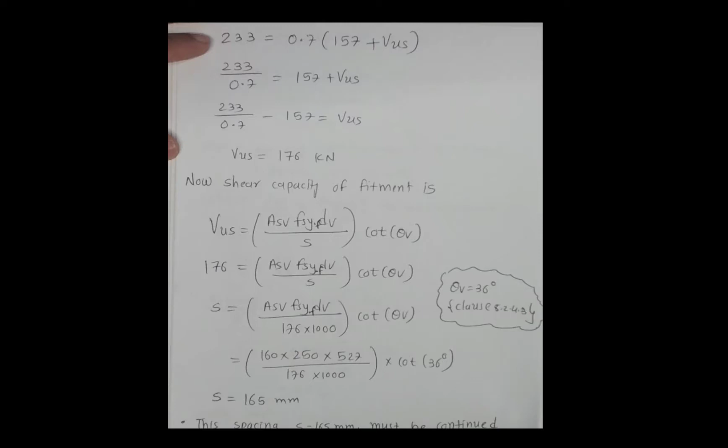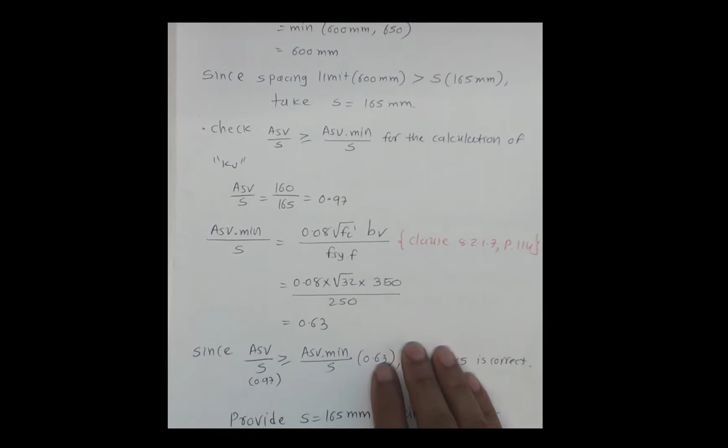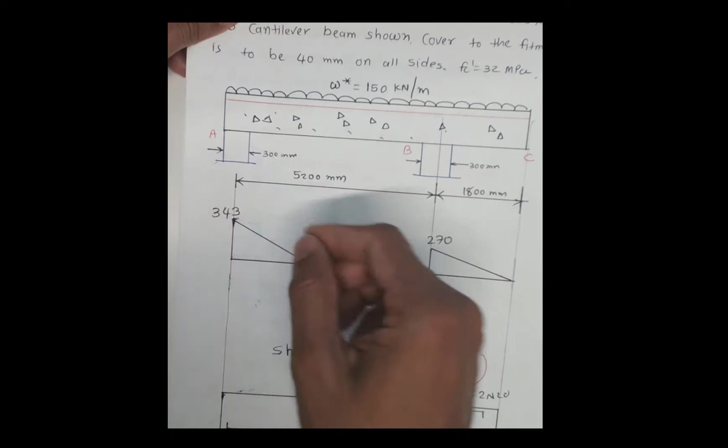Continuing from the past video, we have S equal to 165 millimeters. In that 165 millimeters, we have verified some assumptions here as shown. Now we just need to do some detailing as per the questions. We now work and find the spacing close to support A, which is in this region, and we can draw this view here.

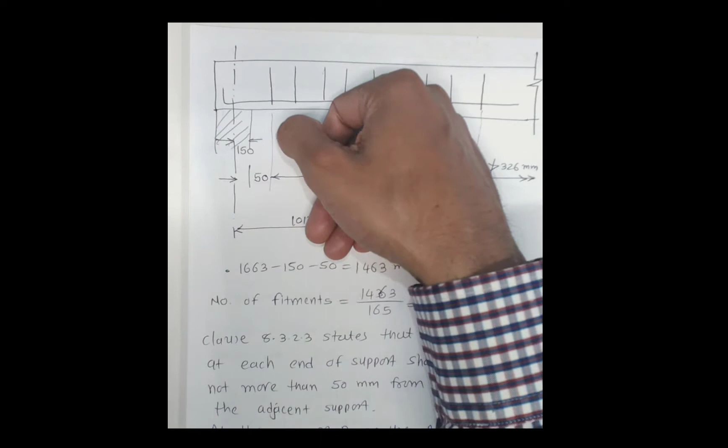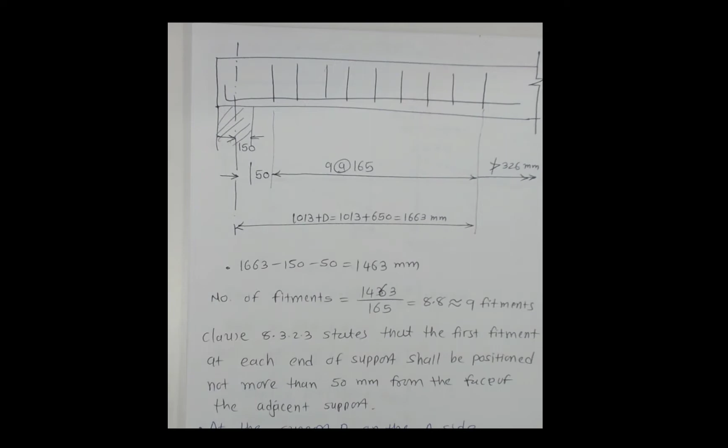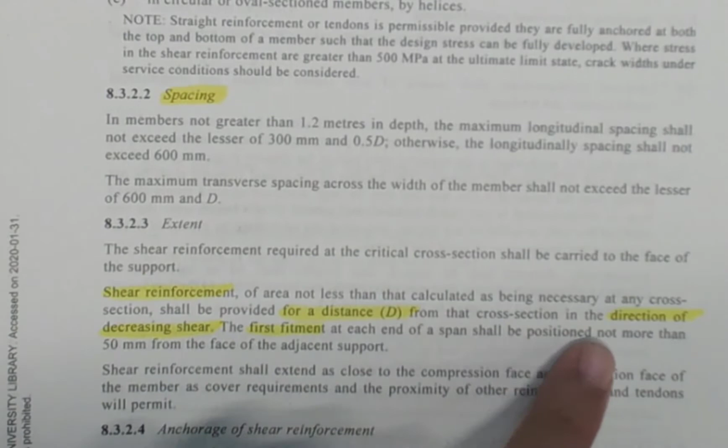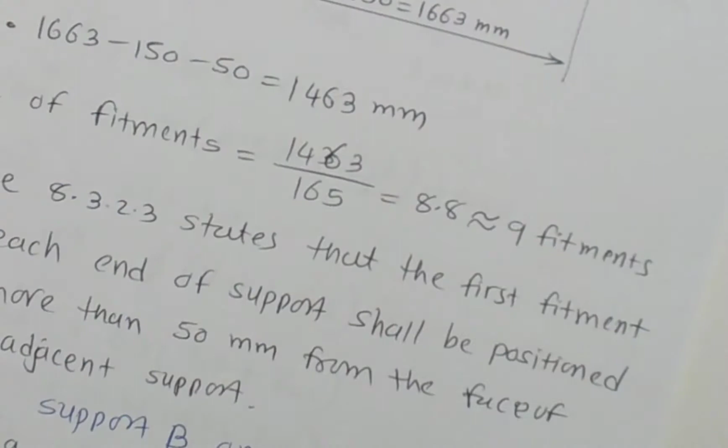Now there is a quick notation here. The first fitment should start at 50 millimeters. This is given in the standard in clause 8.3.2.3. On page number 125, clause 8.3.2.3, we have a line stating the first fitment at each end of the span should be positioned not more than 50 millimeters. So we cannot put the spacing more than 50 millimeters; the first fitment should be placed up to 50 millimeters. You can put less than 50 millimeters, but not more than that. So that's the logic, that we put the first fitment at the closest position.

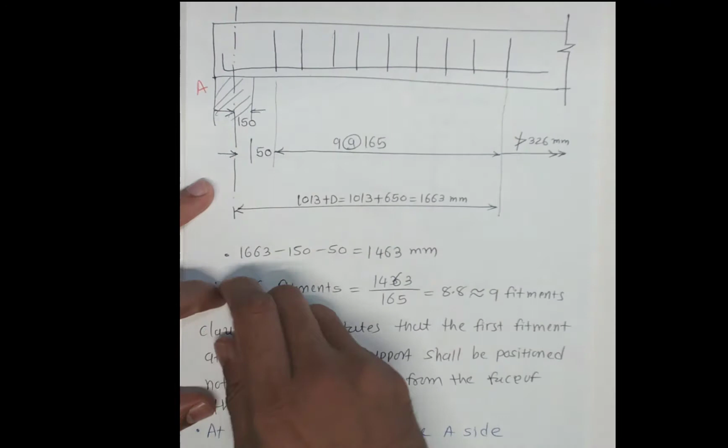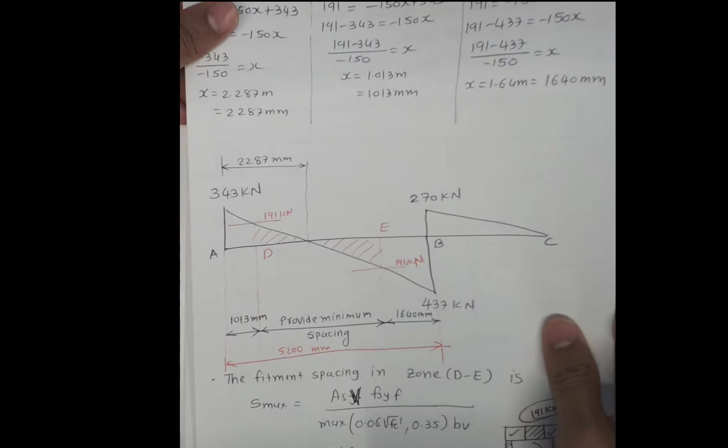This is support A. Close to support A, we have 50 millimeters for the first fitment. Now we need to find this distance. As I mentioned, we know this distance from the previous calculations, which is 1013 millimeters. Now we can't just take 1013 millimeters, we have to extend up to distance D.

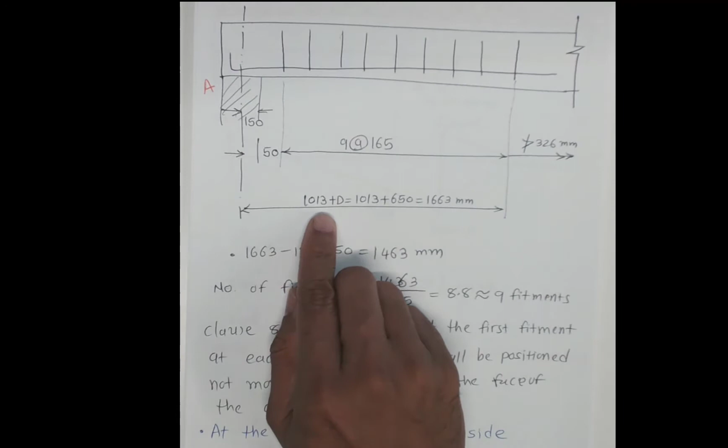So I have 1013 and then plus D, and D is nothing but given in the questions as 650 millimeters, which is the depth of the beam. So that gives 1663 millimeters. Now this is measured from the center of the support.

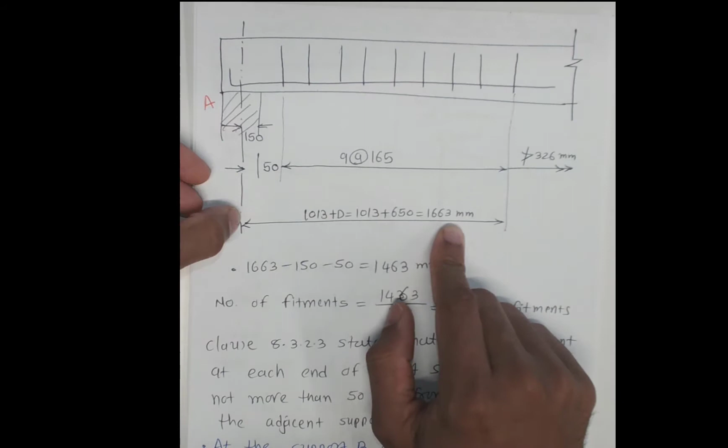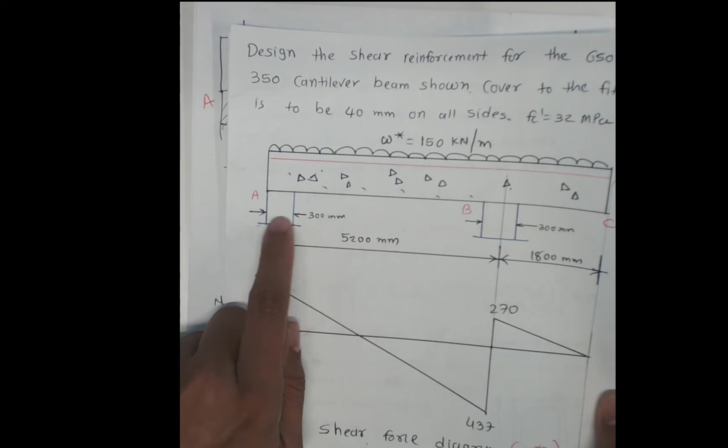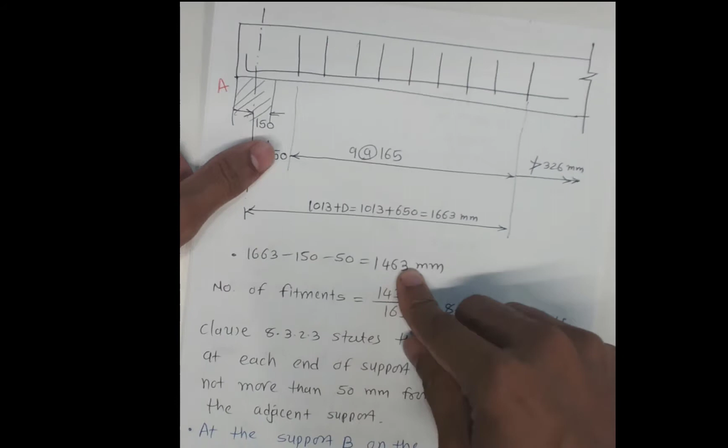So if I want to find this space, which is 1663 minus 150, because the support has a 300 millimeter width, measuring from the center it's 150, minus the first 50 is... that gives us 1463 millimeters. So this distance from the first fitment to the last fitment is 1463 millimeters.

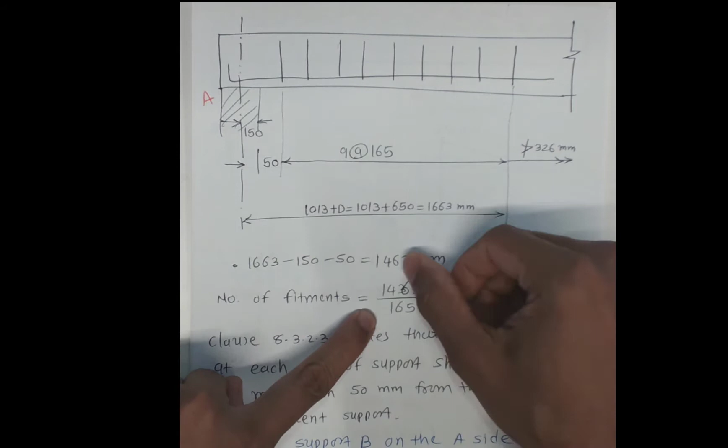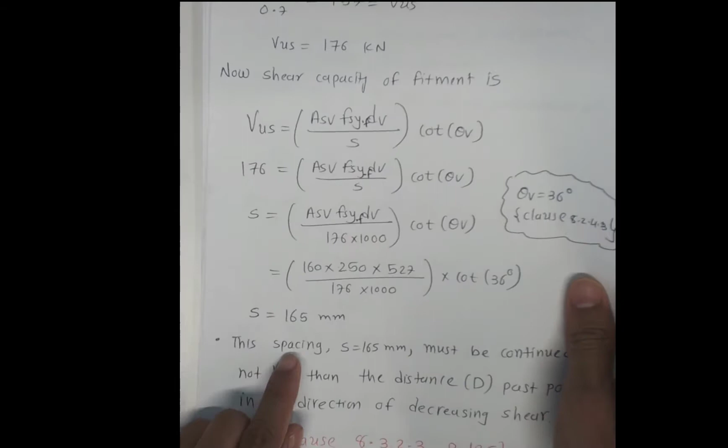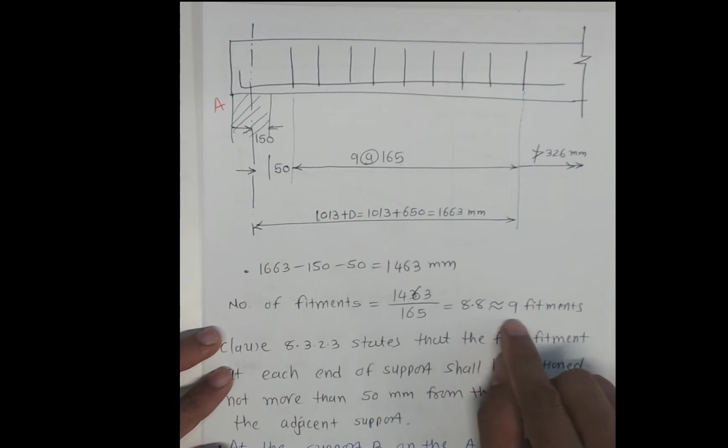So now we need to know how many fitments we can put here. To find the number of fitments, we take 1463 divided by the spacing we found, which is 165 millimeters, that spacing we use it here. So we get 8.8, we can't put 8.8 fitments, so we round off to 9 fitments. So we can provide 9 fitments at a spacing of 165 millimeters.

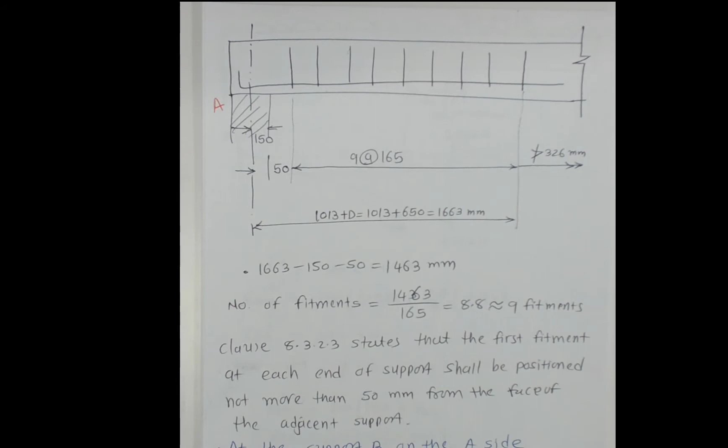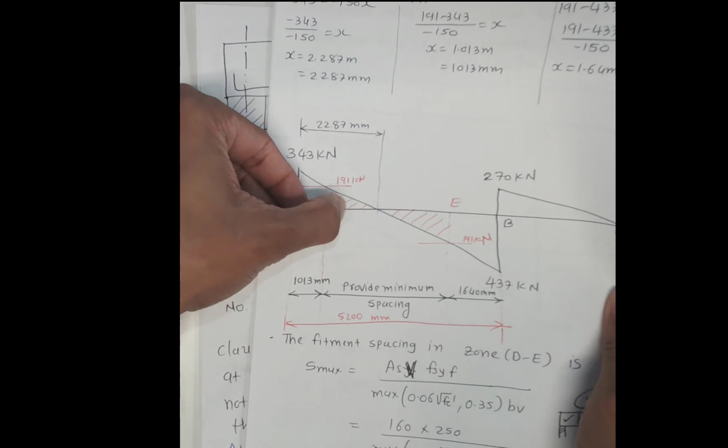And from this line, which is shown here, from here to here, and from this line onwards, we can provide spacing of more than 326 millimeters. So that's the spacing in this zone.

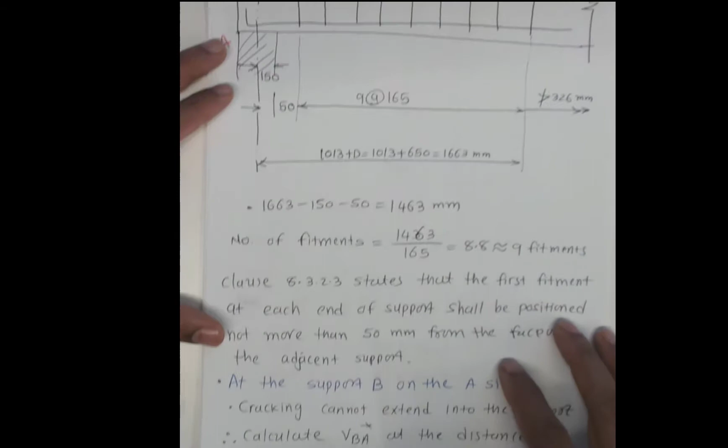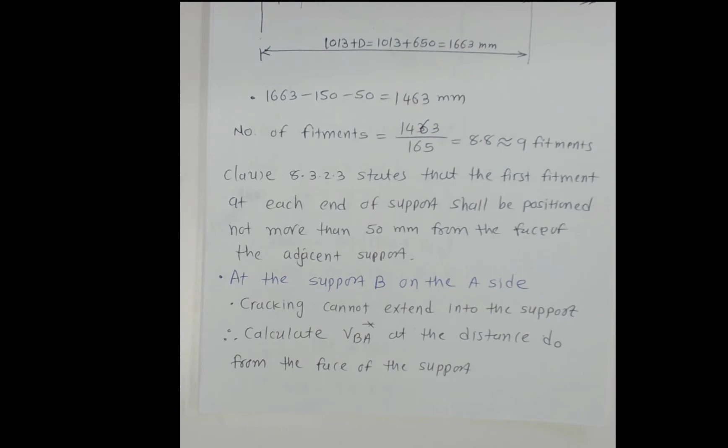Now we would like to find the spacing at support B on the A side. So what we found so far, let me summarize: we found a 165 millimeter spacing, and we also found a 326 millimeter spacing.

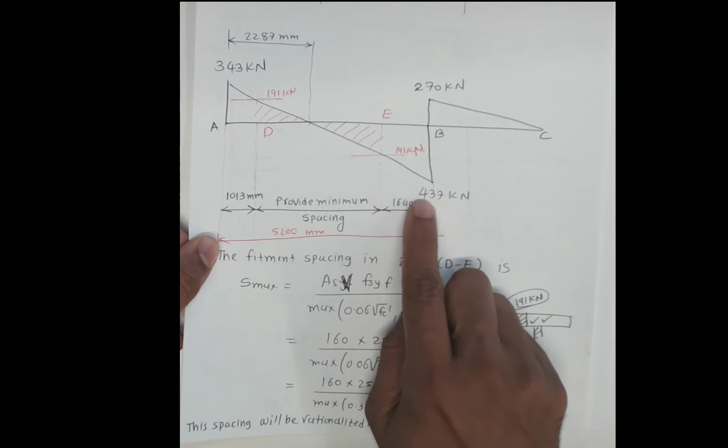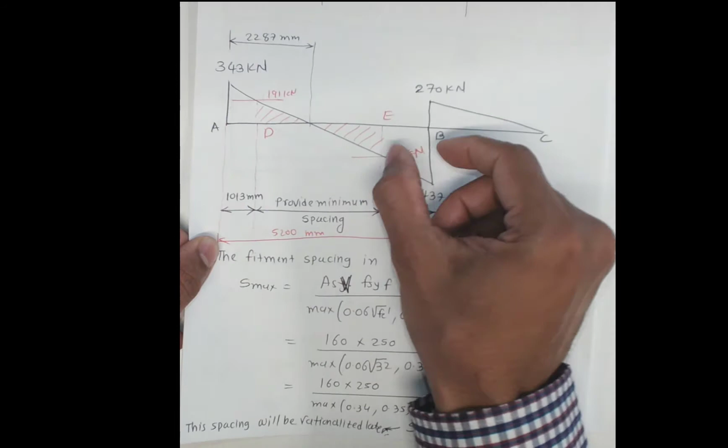Now at support B, we need to find how much spacing we can provide. This one is more critical, you can see they have a larger shear force here. So definitely we will have a spacing smaller than 165, because we need to resist this high shear force. Now we are working close to support B, and we need to find what the spacing is in this region.

Now at support B, we need to find how much spacing we are providing, and it's on the A side. So I'm talking about on the A side, how much spacing we're going to provide on this side, not that side but this side.

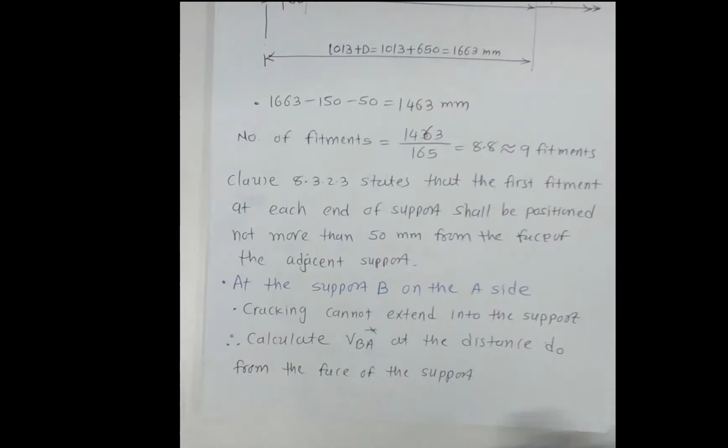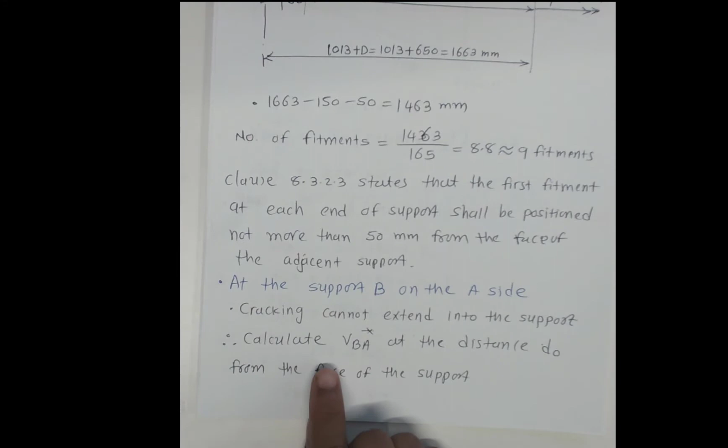Now cracking cannot extend into the support. For example, cracking will not happen in the supports, but the cracking will start from some distance from support B. So we calculate VBA at a distance of D0 from the face of the support. The cracking generally starts at D0 distance, and this is given in the standard.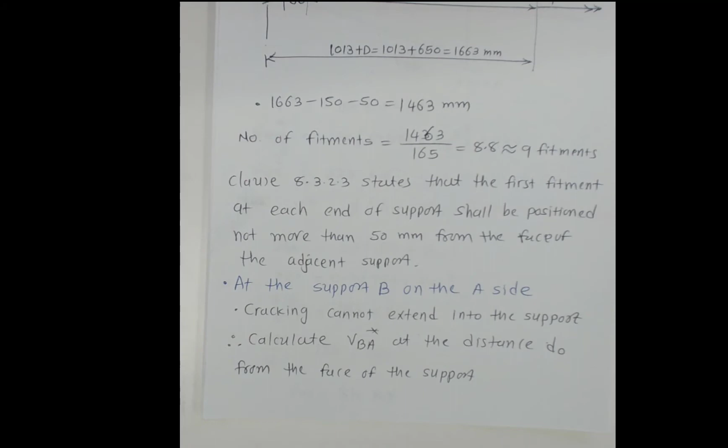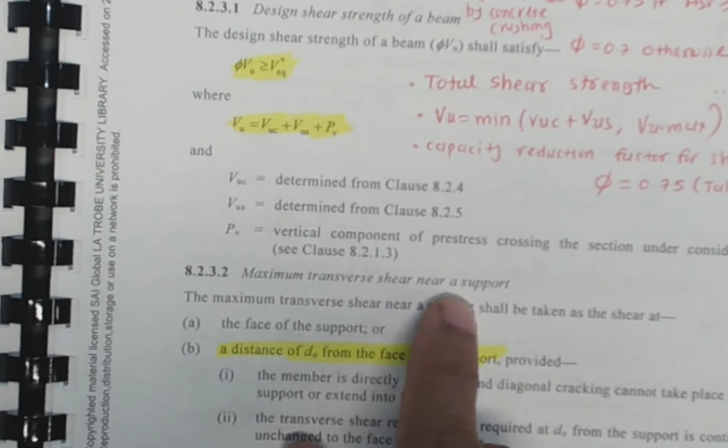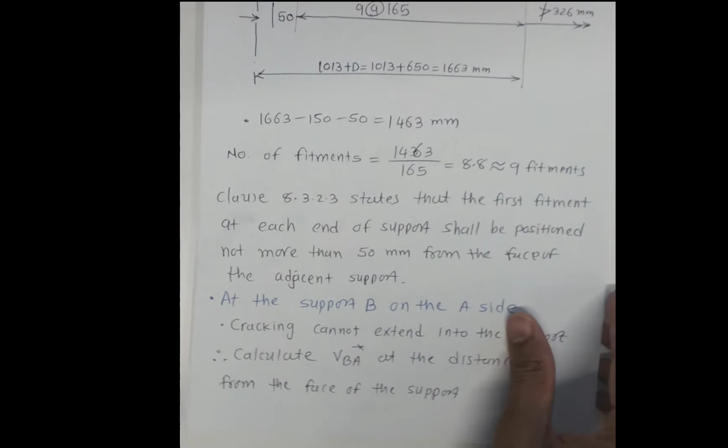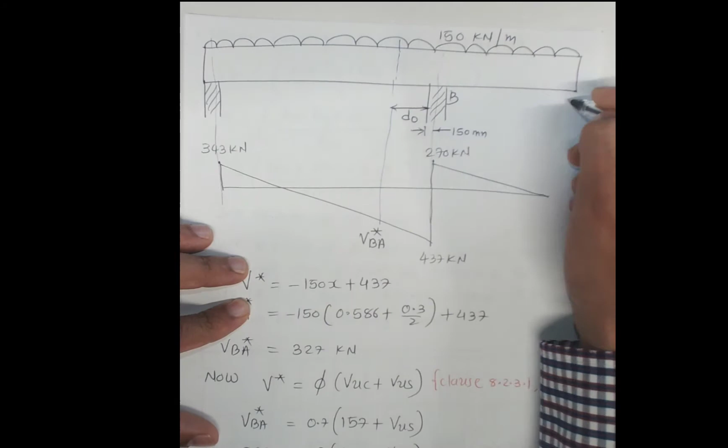So for that case we can draw these figures here, and we have these supports, which is support B, support C, and this is support A, and we need to find the distance d0 from support B, and this is 150.

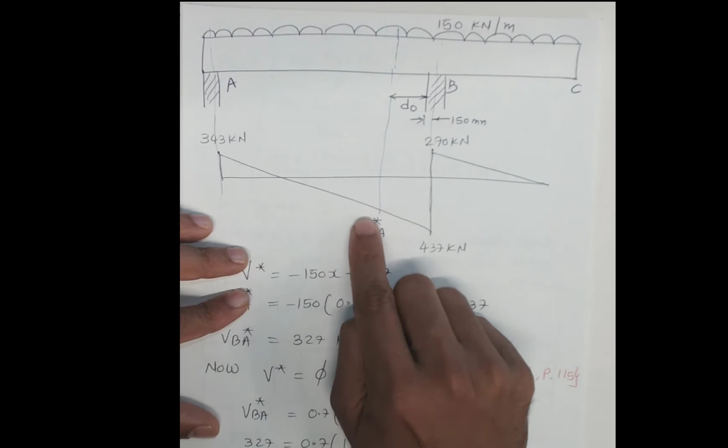So basically we are interested in this shear force. What is this shear force? That is our design shear force. We can't take 437 because the cracking is not at 437. The cracking generally starts far from the support, because we have a concentrated reaction force. That concentrated reaction force has an effect, so the cracking does not start here. There may be some different scenario, but not for the shear cracking.

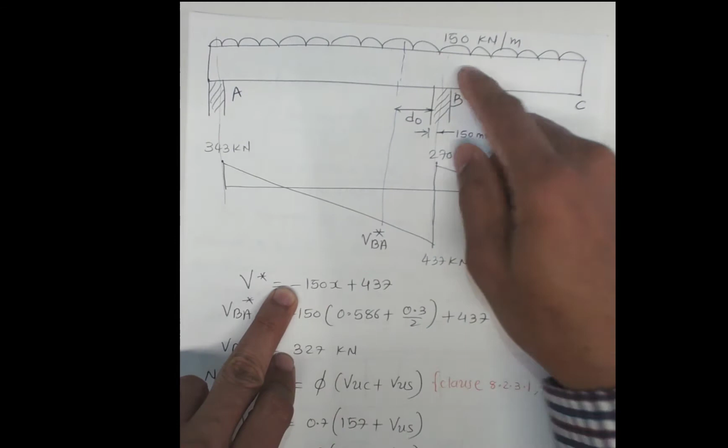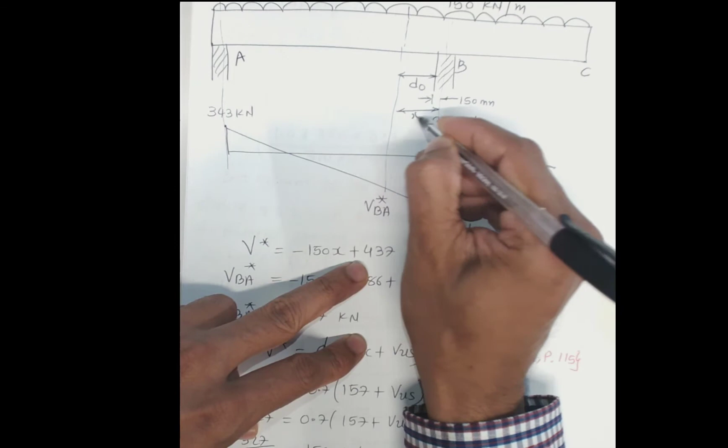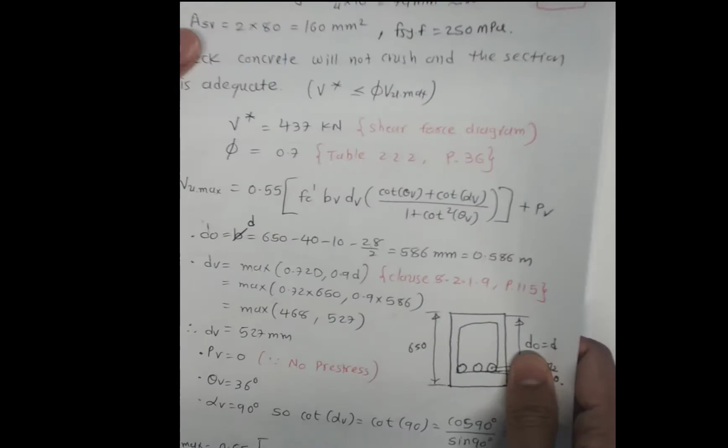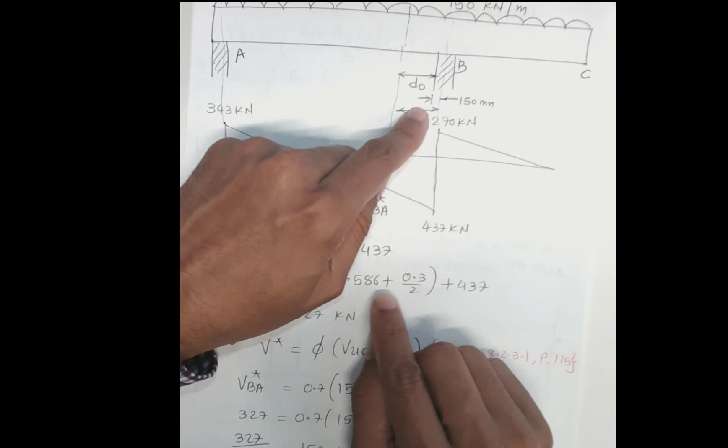Now we calculated d0 in the first steps. We calculated d0 equal to 586 millimeters, which is 0.586 meters. Now in that case we substitute 0.586 meters plus 0.3 divided by 2, which is 0.150, that is just measuring from half of the support, plus 437, it gives us 327 kilonewtons.

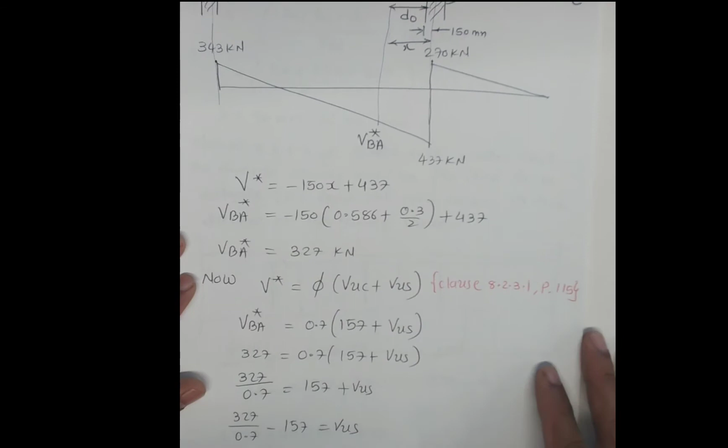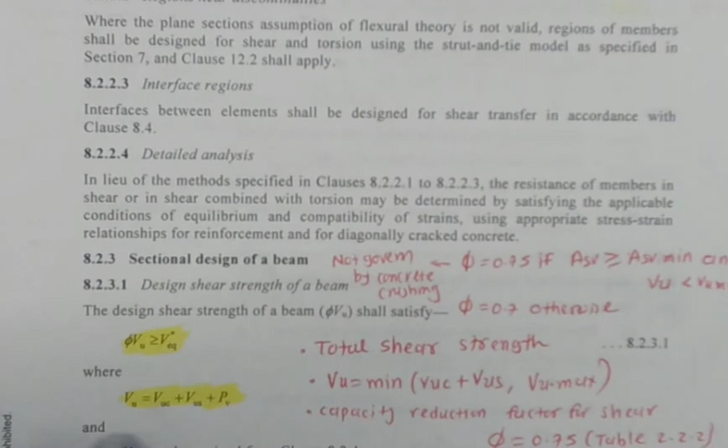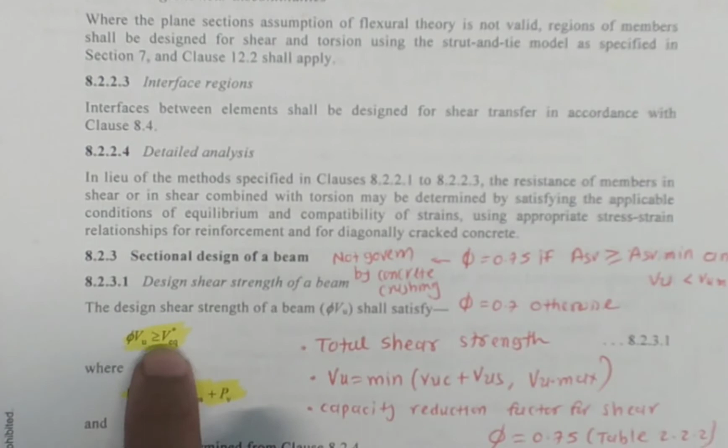Now again we have these equations. I think in the previous video I explained those equations on page number 115. Vu is the capacity of concrete plus capacity of steel. We are taking 0 because of no pre-stress. So V star is equal to phi Vu, and Vu is nothing but Vuc plus Vus. So that's what I've written here.

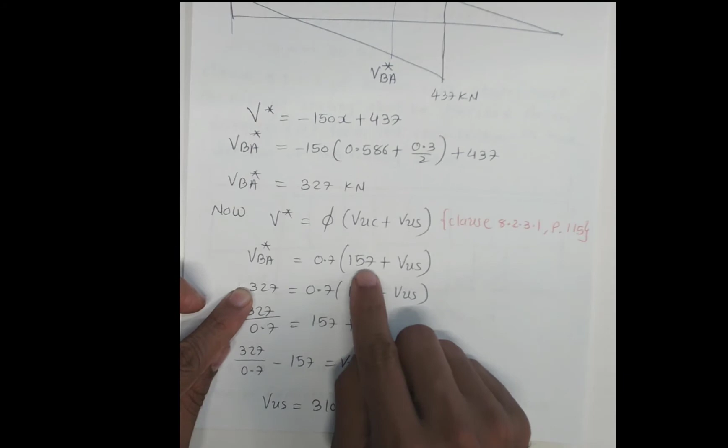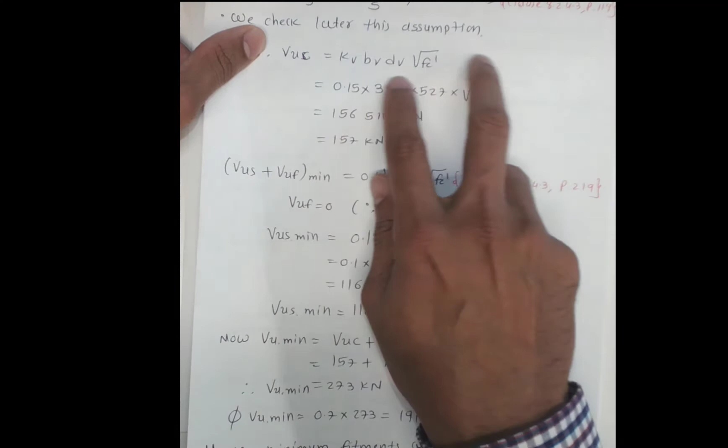We substitute V star equal to capacity reduction factor 0.7, and we have Vuc 157 that we calculated in the previous steps. Vuc we calculated 157. Please note Vuc is constant. It does not depend on the spacing or where the supports are. So we are not calculating Vuc differently regardless of where we are calculating.

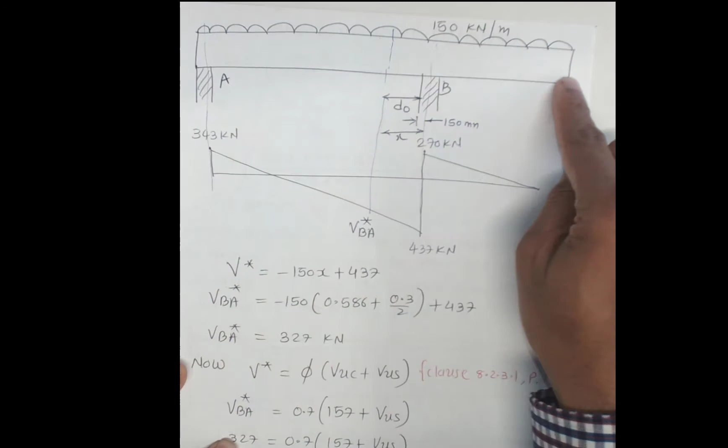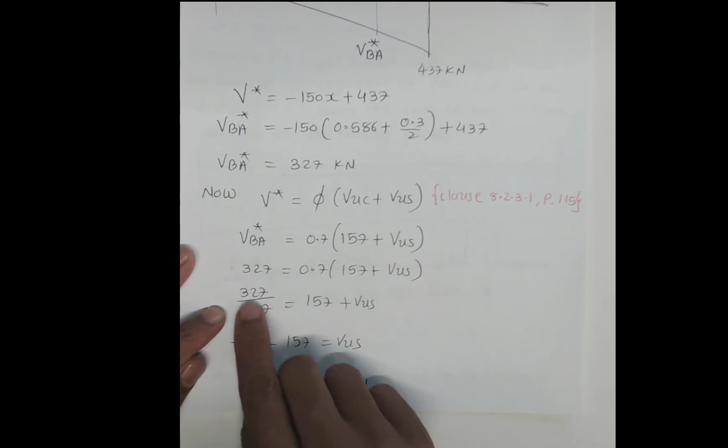Regardless of where we are providing the reinforcement, the fitments, anywhere in the beam, the Vuc is constant. So we always have Vuc constant at 157, and this one varies because it depends on the spacing, how many fitments we are providing and the spacing. So Vus always varies depending on the number of fitments. So if you simplify that one, we will get Vus equal to 310 kilonewtons.

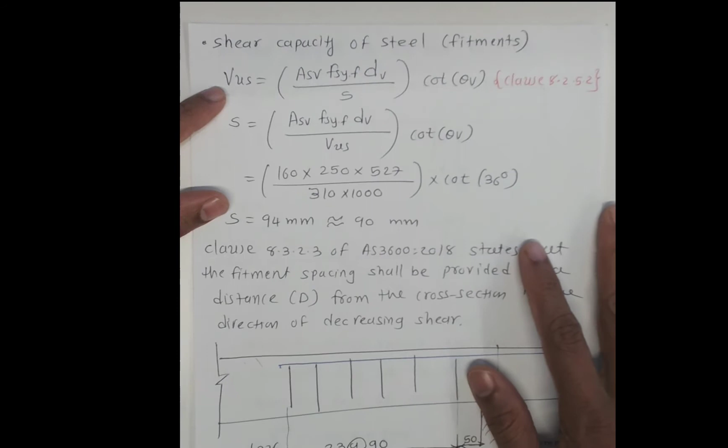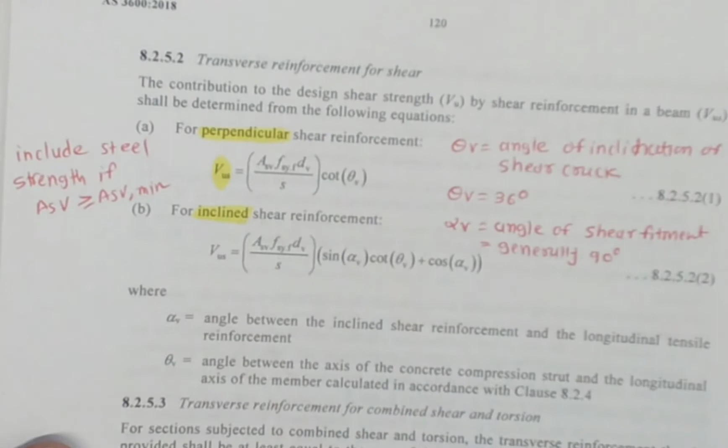Now we have an equation for Vus. That equation is given in the clause. This is the equation for Vus, this big equation, and from that equation we can calculate S. Now I've written it here. I bring this S across in the Vus equation.

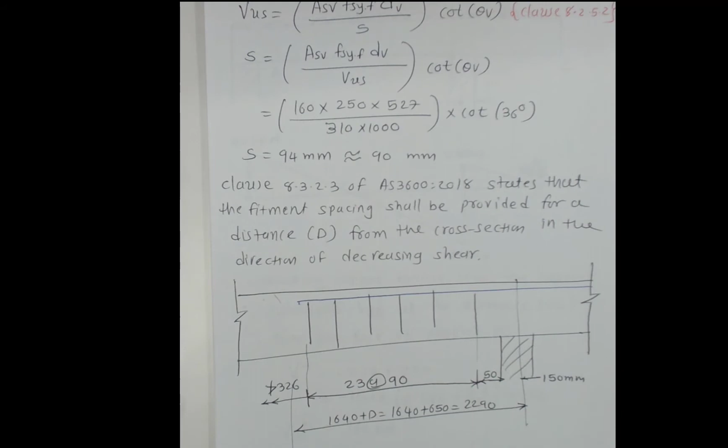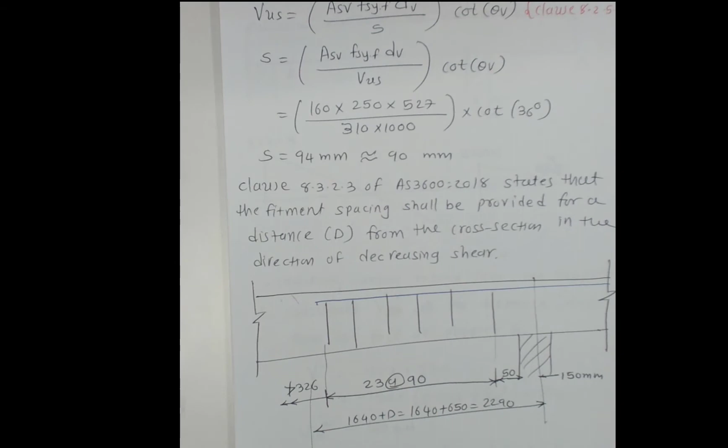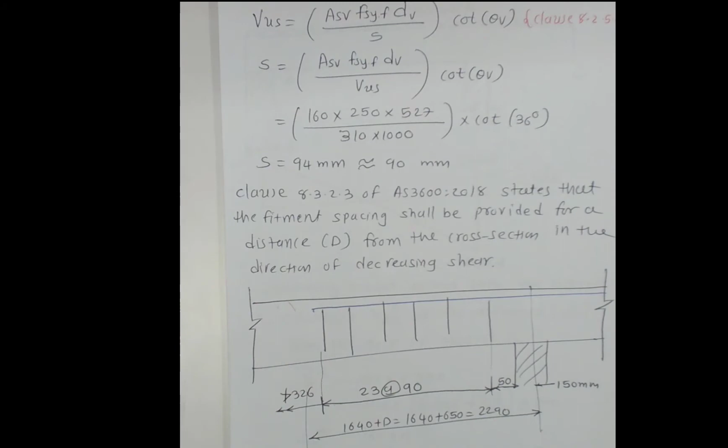I substitute the values. Asv is 160 that we found here, area of the fitment 160 millimeter square. Fsy is 250 megapascals that we assumed. Before that, dv is 527 millimeters, dv we predicted. Vus that we just found, we found 310 kilonewtons, and please note we need it in newtons, so we just multiply by a thousand.

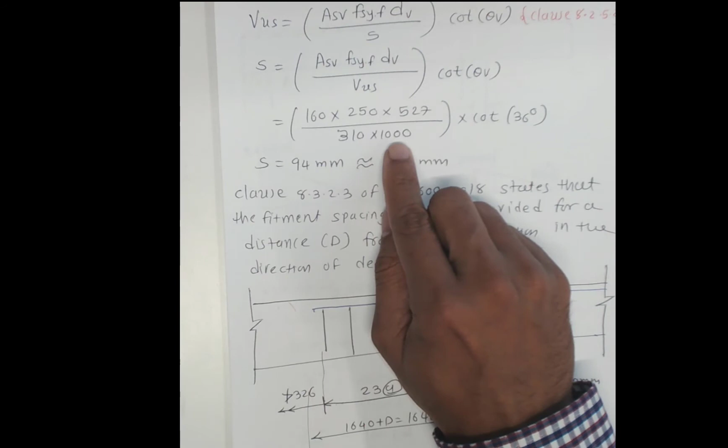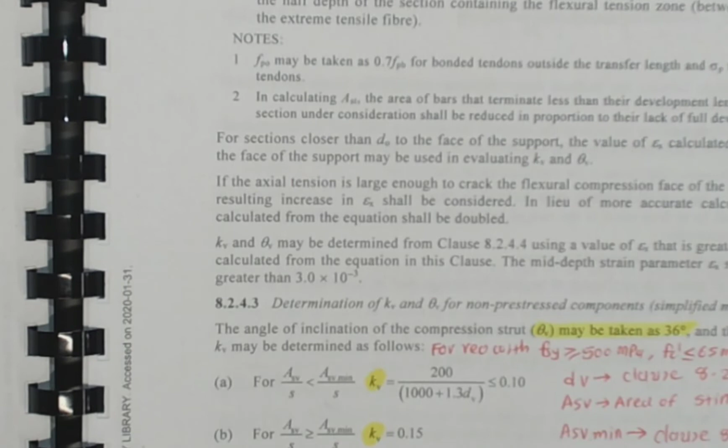And cot 36 is given in the standard. On clause 8.2.4.3 we have the theta v value given in the standard, which is 36 degrees, which is nothing but the angle of the crack. So if you simplify that one, it gives us 94. I'm just taking the rounded number 90 millimeters.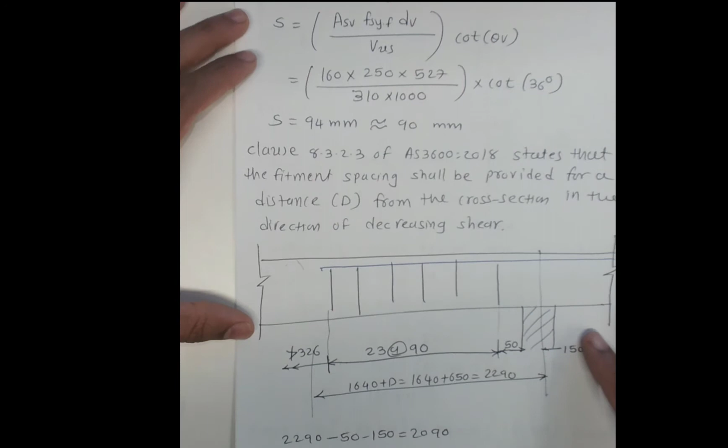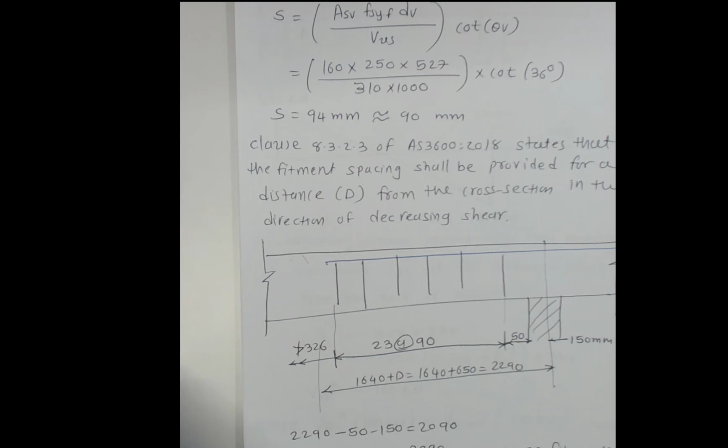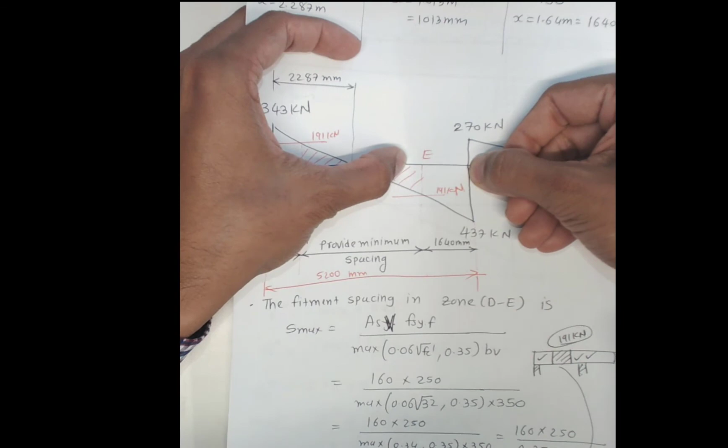Now clause 8.3.2.3 states that the fitment spacing will be provided for a distance d from the cross section in the direction of decreasing shear. So what does it mean? We have the same scenario as in the previous calculations, that we are now in this zone here. So we are not providing the fitment spacing equal to 90 millimeters only from point D to point E, but we are extending that to the distance D from here.

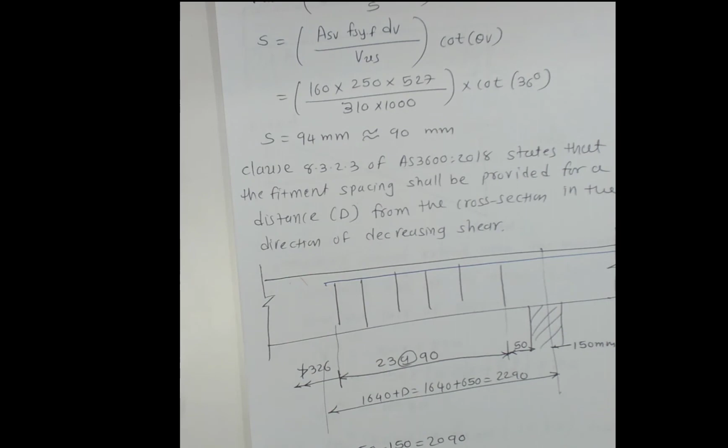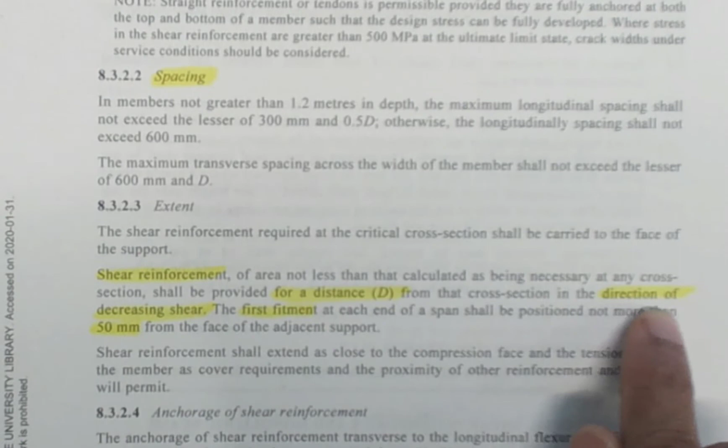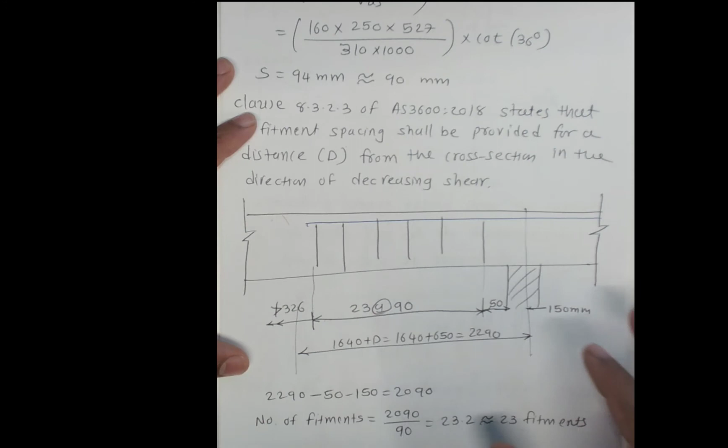Now that is given in clause 8.3.2.3. If you read it here, I think I showed this clause previously as well, that clause 8.3.2.3 has clearly mentioned distance D from the cross section in the direction of decreasing shear. So that is written here. So we are going to do the detailing in the next video, but we stop here. We found S equal to 90 millimeters. Thank you.